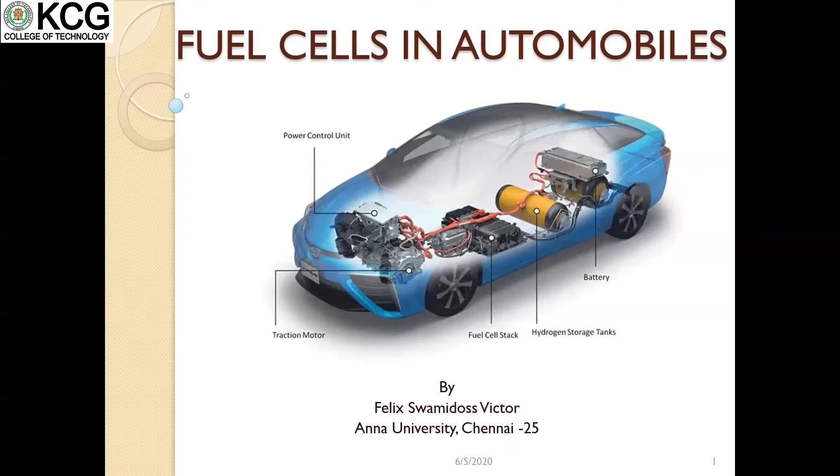As Motilal sir said, I'm Felix Swamidoss Victor, and I did my PhD in mechanical engineering, and my expertise area is fuel cells, that is high temperature fuel cells. I also work in electrospinning for air filtration. This presentation is simple and not brief, so that persons who don't understand the simple concept of a fuel cell can understand it. So this is a simple topic about fuel cells. Let us go into the slides.

These are the chapters which we are going to discuss in this presentation. First, what are the types of fuels that we are using in IC engines? The next is the difference between battery vehicles and fuel cell vehicles. Next, what is a fuel cell and how it works. Next, parts of a fuel cell. Next, the history of fuel cells, how they came into existence. And the next is types of fuel cells. There are 7 different types of fuel cells available; I will tell you later.

The next is hydrogen as a fuel, why we are using hydrogen as a fuel instead of other gases. Next is problems in hydrogen as a fuel; there are also some problems in hydrogen, I will tell you. Next, commercial fuel cell vehicles which are available in the market, and the list of fuel cell vehicles which came into existence in 2020. These are the chapters which we are going to discuss. Now let us go to the first slide.

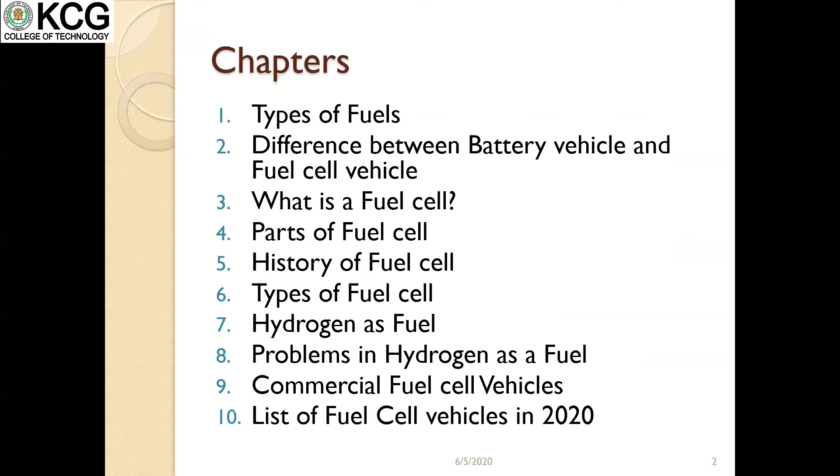First, let us discuss the types of fuels that we are using in an IC engine. The types of fuels are petrol, diesel, liquefied petroleum, compressed natural gas, ethanol, and biodiesel. These fuels are highly efficient and highly reliable. So why do we have to move towards e-vehicles? E-vehicles are nothing but battery powered vehicles and fuel cell vehicles. Though these fuels give high efficiency, why do we have to move towards e-vehicles?

The first problem with these fuels is depletion of natural resources. Depletion is one of the major problems; we cannot get fuels from other resources, because the oil economy is based on the fuels, right? The major economy of the world's countries is based on oil only. So we should move towards e-vehicles.

Then the next major problem is pollution. Pollution is one of the major problems for global warming. About 75 to 80% of the maximum pollution is caused only through IC engine vehicle exhaust, which causes maximum pollution gases like COx and other NOx gases. This is why we should move towards e-vehicles in order to safeguard our next generation.

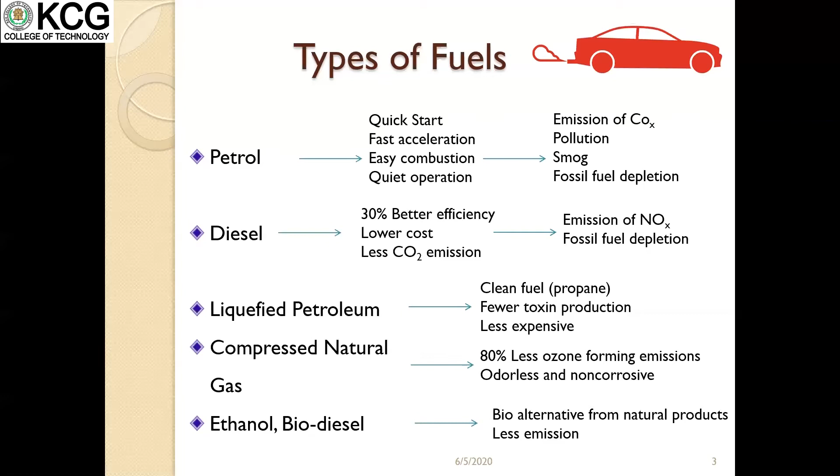Now let us go to the types of e-vehicles. E-vehicles can be classified into two categories. One is battery powered vehicles, another one is called fuel cell vehicles. If you see, these two vehicles are completely different in their working, but something lies common in between them. It is the principle of working.

In the case of battery powered vehicles and fuel cell vehicles, they work on the principle of converting the chemical energy, that is the fuel, directly into electrical energy. If you take an IC engine, internal combustion engine, what principle does it work on? It works on the principle of converting the chemical energy, that is the gasoline, into heat energy, and then it is used as mechanical energy. But in the case of e-vehicles, it is completely different.

Now we can see what a battery powered vehicle is. A vehicle which gets powered through a self-contained battery by converting the fuel into electricity. Such types of vehicles are called e-vehicles. Most vehicles we are using use lead acid batteries or lithium ion batteries, which are low cost batteries, and really efficient in the case of battery powered vehicles.

What are the advantages of battery powered vehicles? First, it doesn't produce noise pollution or other pollution. Next, when compared to an IC engine, it has very less maintenance, because we don't have to do monthly or yearly maintenance. We don't have to change its system like oil changing or the cooling system. There is no filter, there are no belts or hoses to replace. So these are the advantages of battery powered vehicles.

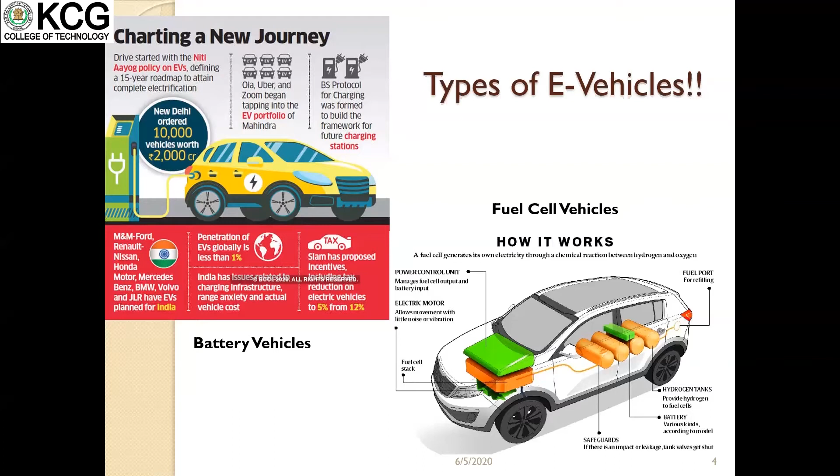Next is fuels. What type of fuel are we using in a fuel cell vehicle? It is hydrogen, which cannot be easily transported or stored. So if there is a fuel cell station, the reforming unit of hydrogen should be there, because it is difficult to transport hydrogen on a large scale. So those are the major disadvantages and the difference between e-vehicles, that is battery powered vehicles, and fuel cell vehicles. Now let us go to what is meant by fuel cell.

Now let us see the working of fuel cell. I will give a simple definition. You can make a note of it. Fuel cell is an electrochemical device that directly converts chemical energy into electrical energy. A fuel cell is similar to a battery powered vehicle, which directly converts chemical energy into electrical energy, whereas in the case of an IC engine, the chemical energy is converted into heat energy and then into mechanical energy. Both batteries and fuel cells convert chemical energy into electrical energy.

And about the byproduct of this process: in the case of an IC engine, what is the byproduct? The tailpipe exhaust. We get particles such as carbon monoxide and nitrous oxide in the tailpipe exhaust, which is an emission. In the case of a battery powered vehicle, what is the output we get? We get an output as heat. In the case of fuel cell, the output is nothing but heat and water. I will explain the working in the next slide.

You can see here, a battery powered vehicle is a closed store of energy within it. So when the charge gets depleted, we should recharge the battery for 3 to 4 hours. But in the case of fuel cell, we can go to a fuel station, we can refuel it, and we can use it, which is a very efficient way.

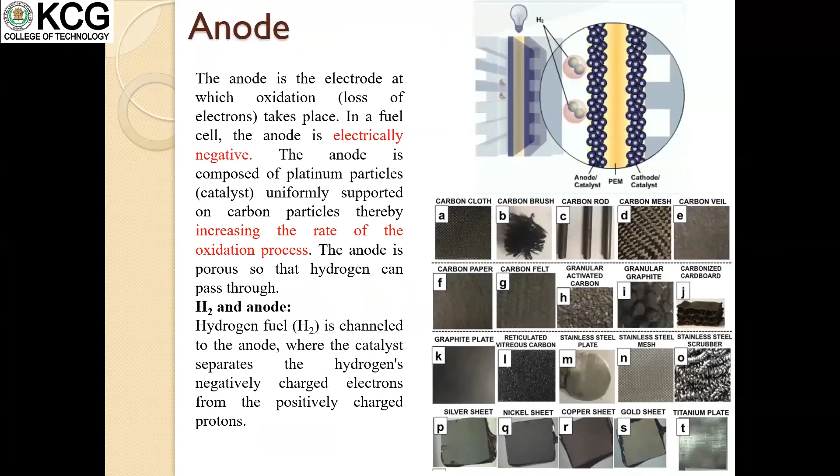We can also use graphite and other noble metals like silver, gold, and titanium as an anode. In the case of a cathode, we can use similar metals. Whatever we have used for the anode, you can use the same metals for the cathode.

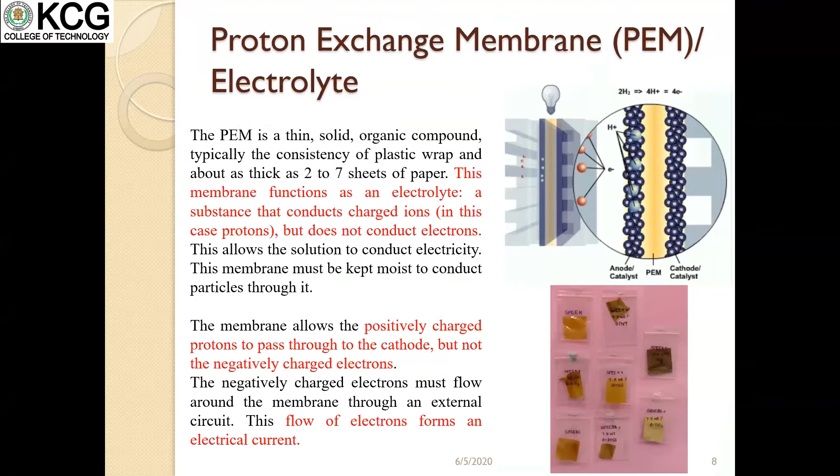You can see anode lies in the left part of the fuel cell and cathode lies in the right part of the fuel cell. Okay, what is the center part? The center part is called the heart of the fuel cell, which is nothing but the membrane. What does a membrane look like? A membrane just looks like a plastic wrap. As you can see in the right corner, these are the types of membrane which we have developed in our university for use in fuel cells. A membrane is the one which only allows the positive charges to pass through.

Now I will explain the working, how it works. If you see in anode and cathode, each consists of a catalyst. Mostly, the catalyst will be a platinum catalyst if the fuel cell is used in vehicles. Okay. The anode part consists of a catalyst and the cathode part consists of a catalyst. Now, let me tell you what happens here.

When the fuel is supplied into the fuel cell, the hydrogen gas comes into the anode chamber, which is the negative pathway of the fuel cell, where it touches the catalyst and the hydrogen atom splits into two. One is the electron and the other one is the proton, where the electron is the negative charge and the proton is the positive charge. So what happens? The membrane only allows the protons to pass through, while the electrons get transferred through an outer circuit. If an electron moves, what happens? Simple. Electricity is generated, so that electricity can be used to run a vehicle.

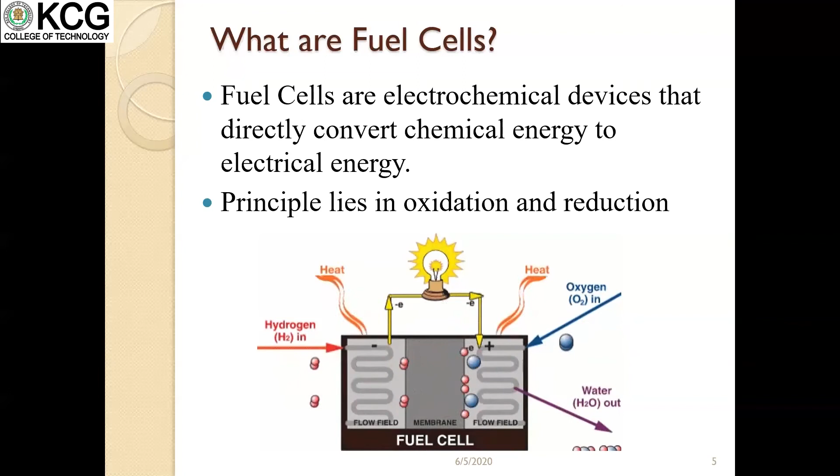So what happens in the cathode section? In the anode section, oxidation takes place, and in the cathode section, reduction takes place by combining hydrogen, which combines with the oxygen molecule readily available in the environment. So the output will be water and heat. This is how a fuel cell works. This is the simple concept of how a fuel cell works.

I will show you in this diagram, in this video. One minute. You can see in this video the hydrogen molecules come in contact with the catalyst in the anode, and they get split into two. One is the positive charge which passes through the electrolyte, and the negative charge passes through an outer circuit. Now what happens? The negative charge and positive charge recombine. That is, reduction takes place; they recombine with each other, combine with the oxygen molecule, and form an output of water. This is the working of the fuel cell.

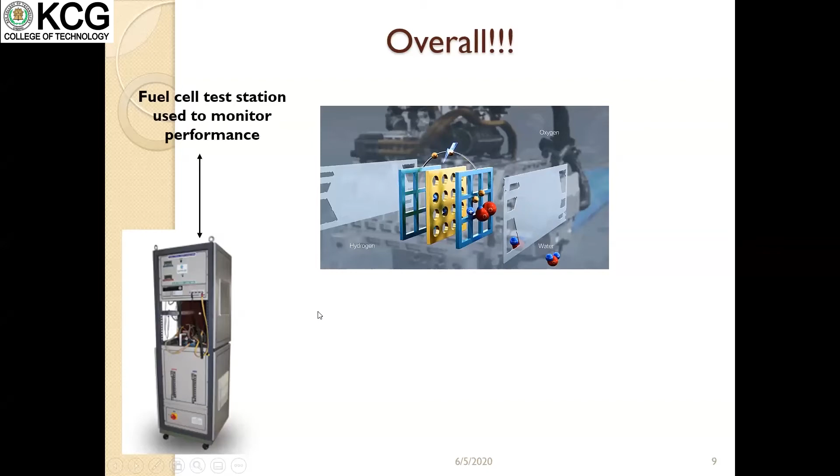Okay, now let us see. Sorry, one minute. Now let us see the history of the fuel cell. So this is the history. The fuel cell was first invented in the early 1800s. It is more an evolutionary technology than a revolutionary one. The fuel cell was originally invented in the early 1800s by Humphry Davy. He was the one who first gave the principle of what later became the fuel cell. This technology was gradually developed and used in the NASA Apollo space program in the late 1960s to 1970s.

At this time, General Motors was the only company who came up with the idea of developing a fuel cell. The first fuel cell which came into development was an alkaline fuel cell. There are different types of fuel cell; I will tell you in the next slide. General Motors was the first one to develop an alkaline fuel cell, which they used in the Gemini space program.

It is a tractor which produces an output power of 15 kilowatt with a pulling weight of 1360 kilograms, which is really high at that time. And early in 1966, General Motors also designed a vehicle, a minivan, which can run a top speed of 114 kilometers with a traveling range of 240 kilometers by using a fuel of about 5.4 kilograms of hydrogen.

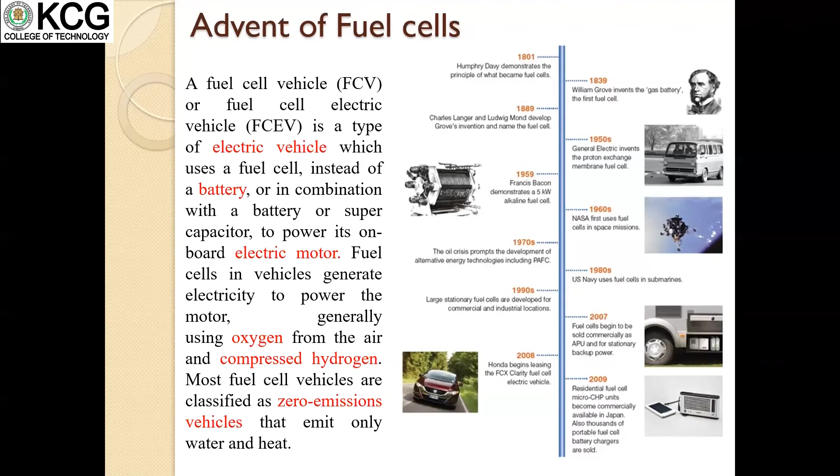In the last decade and this decade, you can see there are not many fuel cell cars developed. In the last year, there are so many fuel cell cars that came into market. The major 4 companies which are contributing in fuel cell vehicles are Hyundai, Honda, Nissan, and Toyota. In the case of India, there are fuel cell vehicles, but not commercially available. We are still in the research phase because we are more concentrating on battery powered vehicles.

Next, you can see types of fuel cells. Fuel cells can be classified into 7 different types, based on 2 categories: one is the type of membrane it uses, and the other is the type of fuel it uses. First is the proton exchange membrane fuel cell, a technology invented in 1958, but which we are still using. Its temperature is around 80 to 100 degrees Celsius, so this technology is still used in vehicles.

The alkaline fuel cell was the first technology ever developed by General Motors. Here the electrolyte is potassium hydroxide, which is a liquid, and the temperature range is 150 to 200 degrees Celsius, which is relatively very high compared to proton exchange membrane fuel cells, so it cannot be used in vehicles. Alkaline fuel cells are used in the space station to produce heat as well as water for the humans working in the International Space Station.

Next is phosphoric acid fuel cells, otherwise called stationary fuel cells, because due to their large size they are only used for stationary purposes. The electrolyte in phosphoric acid fuel cells is phosphoric acid, which is also a liquid, and the temperature is relatively very high, 180 to 200 degrees Celsius, and they are used for hydrogen production.

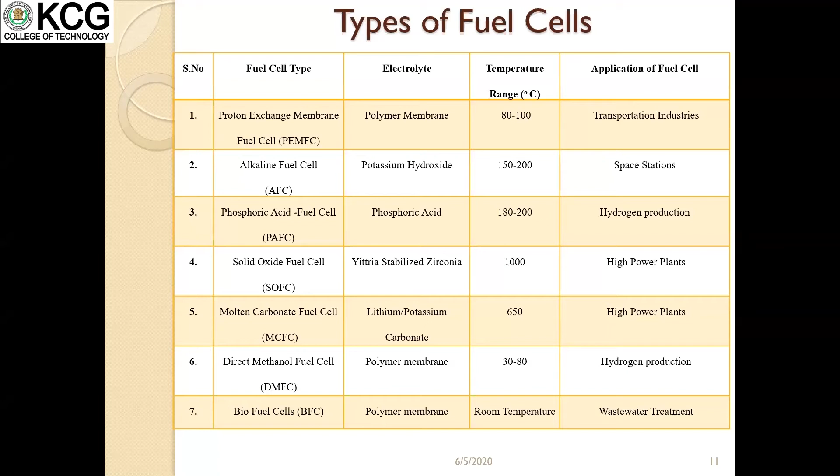From that wastewater we can generate electricity, but the electricity is not up to the mark of a fuel cell, because a fuel cell is relatively highly efficient and can run a power plant. But a biofuel cell can only charge a mobile phone. That is a simple application of a biofuel cell. They are still used in wastewater treatment to produce electricity.

Next, we can go deeply into the types of fuel cells. This is known as the proton exchange membrane fuel cell. As you can see in the image, this is how it looks. A proton exchange membrane fuel cell is otherwise called a polymer electrolyte membrane fuel cell. What is the advantage in it? It delivers high power density and offers the advantage of low weight and volume compared with other fuel cells.

As I already said, the proton exchange membrane fuel cell uses a polymer membrane, but we can use other types of membrane like Nafion. Nafion is one of the major types of membrane used all over in vehicles, because it is relatively cheap and highly efficient.

Next, what fuel does the proton exchange membrane fuel cell need? They only need hydrogen and oxygen from air to operate. They are typically fueled with pure hydrogen supplied from storage tanks or reformers. The proton exchange membrane fuel cell operates at a relatively low temperature. That's why we are using it in vehicles, and its major advantage is a fast starting time. For a vehicle to start up, it needs a fast starting time, and this fuel cell has one.

However, it requires a noble metal catalyst, typically platinum. I have told you, the catalyst is the one which splits the hydrogen molecules into protons and electrons. So the proton exchange membrane fuel cell needs a catalyst made of platinum. As you know, platinum is extremely costly and extremely sensitive, so it adds system cost. Why is it extremely sensitive?

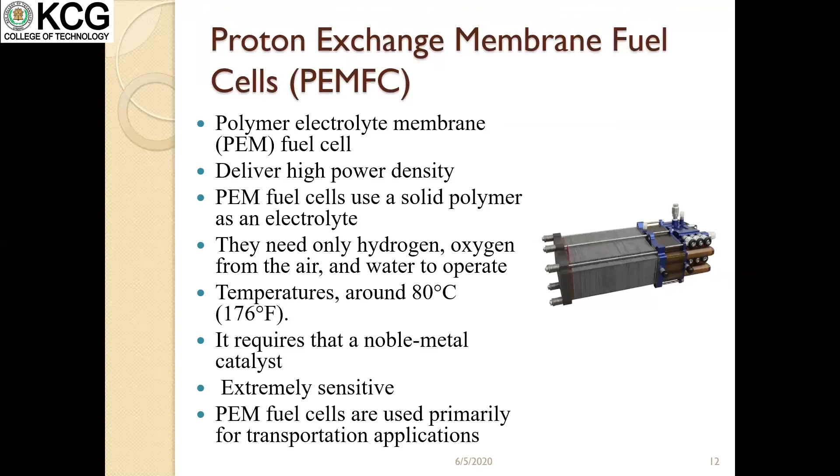Now let us see the alkaline fuel cell. You can see the alkaline fuel cell in the right corner. This is how an alkaline fuel cell looks in the space station. We are using it in the space station. The alkaline fuel cell was the first fuel cell technology which was developed.

They were used for the US space programs to produce electrical energy and water onboard spacecraft for the humans who are working there. Okay, these fuel cells use a solution of potassium hydroxide. In the case of proton exchange membrane fuel cell, we use a polymer membrane. In the case of an alkaline fuel cell, we use potassium hydroxide as an electrolyte, and a non-precious metal can be used as a catalyst.

Whereas in the proton exchange membrane fuel cell, we use a catalyst called platinum. Okay, but in the alkaline fuel cell, we don't need to use a platinum catalyst. We can also use other types of non-noble metals, which are relatively cheap.

Next, in recent years, instead of using an alkaline potassium hydroxide liquid, scientists have developed the idea of an alkaline membrane. Okay, alkaline membrane. They have developed an alkaline membrane which is more efficient than potassium hydroxide. These fuel cells are closely related to the conventional proton exchange membrane fuel cell, except they use an alkaline membrane instead of an acid membrane.

And as you can see, the high performance of the alkaline fuel cell is due to the fast electrochemical reaction that takes place. We can get an efficiency of about 60% from the alkaline fuel cell. And the key challenge in this fuel cell is that it is susceptible to poisoning by carbon dioxide. Both proton exchange membrane fuel cells and alkaline fuel cells can be poisoned.

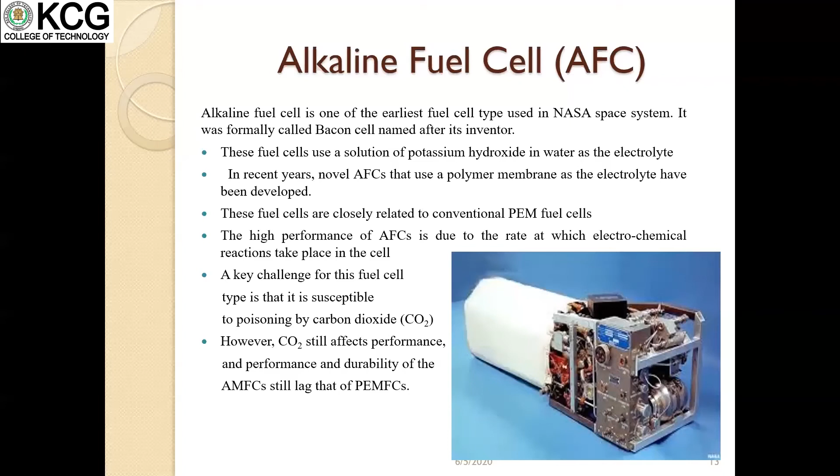Now you can see this is the phosphoric acid fuel cell. You can see the image of the phosphoric acid fuel cell, which looks like an inverter, right? It is really big, and it occupies a large volume. The phosphoric acid fuel cell uses liquid phosphoric acid as an electrolyte, the same as the alkaline fuel cell uses potassium hydroxide. In the phosphoric acid fuel cell, this acid is contained in a Teflon bonded silicon carbide matrix.

Okay, it is bonded in a silicon carbide matrix, and porous carbon electrodes containing platinum as a catalyst are used here, because phosphoric acid and proton exchange membrane fuel cells should use porous carbon with platinum as a catalyst, since platinum is the only compound in phosphoric acid fuel cells which can separate the fuel. Okay, that is the hydrogen.

The phosphoric acid fuel cell is considered the first generation of modern fuel cells. It is one of the mature cell types and the first to be used commercially. This type of fuel cell is typically used for stationary power generation. They are not used for transportation; we cannot use the phosphoric acid fuel cell in vehicles because it occupies a large volume. The phosphoric acid fuel cell can give an efficiency of about 85% when heat and electricity are combined.

But if we calculate only the electricity, the phosphoric acid fuel cell can only give 37 to 42%, which is much less than the alkaline fuel cell and proton exchange membrane fuel cell. As a result, they are typically large and heavy. They also require a much higher loading of platinum compared to the proton exchange membrane cell to separate the molecules. So that adds cost to the system, and it is really expensive.

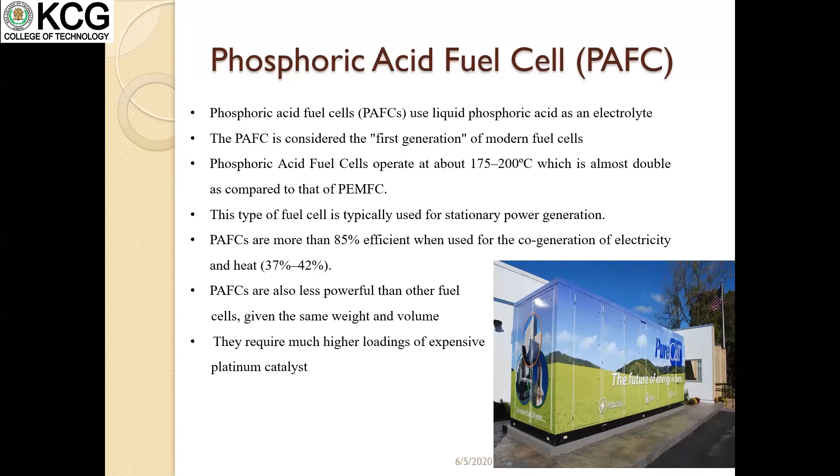Phosphoric acid fuel cell is expensive. Next is solid oxide fuel cell. Solid oxide fuel cell is something different because it is called a high temperature fuel cell. I will tell you why. Solid oxide fuel cells use a hard porous ceramic compound as an electrolyte.

They never use a polymer membrane because they operate at a temperature of 1000 degrees Celsius, and at that temperature we cannot use a polymer membrane or potassium hydroxide or alkaline. We cannot use that because it will evaporate and it will melt. So we are using a ceramic.

Usually we are using zirconia as an electrolyte. The advantage in the solid oxide fuel cell is we don't need any catalyst to split the molecules because it is operated at a temperature of 1000 degrees Celsius. We don't need any catalyst like platinum or any other noble metals. Okay, what is the other property of this solid oxide fuel cell?

It is sulfur resistant, so corrosion resistant, and it cannot be poisoned by either carbon monoxide or carbon dioxide. And not only hydrogen, it can also use natural gas, biogas, and gas made from coal as fuel. This high temperature operation also has a disadvantage. What disadvantage is that? It has a slow startup time.

This slow startup time will never let the solid oxide fuel cell get into vehicles, because in vehicles we need a fast startup time like the proton exchange membrane fuel cell. And it works at a temperature of 1000 degrees Celsius. At this temperature, heat is generated, so we need thermal shielding. Thermal shielding is also costly, so it is also a problem. This is acceptable only for utility applications, but not for transportation.

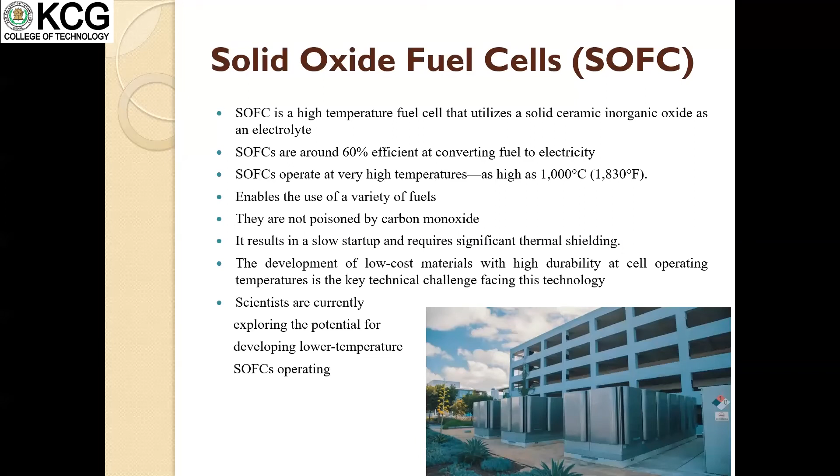This high temperature decreases the durability of the material, which is a key challenge we are facing in this technology. Nowadays, scientists have developed a solid oxide fuel cell that operates at about 700 degrees Celsius. But when we compare it with the 1000 degrees Celsius solid oxide fuel cell, the efficiency is relatively very low. Next is molten carbonate fuel cell.

Molten carbonate fuel cells are currently being developed for natural gas and coal-based power plants for electrical utility, industrial and military applications. Molten carbonate fuel cells are also known as high temperature fuel cells, like solid oxide fuel cells, operated at 600 to 700 degrees Celsius. What is the electrolyte? A molten carbonate salt mixture suspended in a chemically inert ceramic lithium aluminum oxide matrix. This compound is highly resistant to heat.

Because they operate at 650 degrees Celsius, which is a relatively high temperature, we don't need any catalyst, as I said for the solid oxide fuel cell. We don't need a catalyst like platinum in molten carbonate either, because a temperature of about 650 to 700 degrees Celsius is enough to split the molecules.

Next, improved efficiency is another advantage of the molten carbonate fuel cell. Compared with other fuel cells, molten carbonate is the only fuel cell which can give an efficiency of about 65%, which is relatively very high. And when it co-generates heat and electricity, it can give up to 85%.

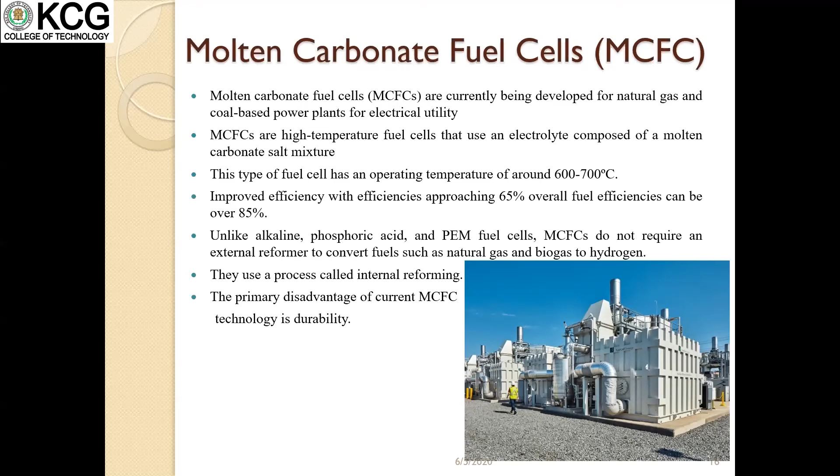What is the disadvantage? The primary disadvantage is durability. Durability is the major problem, and corrosion is also a major problem in the molten carbonate fuel cell. Next is direct methanol fuel cell. Direct methanol fuel cell is completely different from other fuel cells.

You can see direct methanol fuel cells usually use pure methanol, which is mixed with water and fed directly into the anode to start the reaction. Whereas in the case of other fuel cells, we are using hydrogen, natural gas, coal gas, and other gases also. But in the case of the direct methanol fuel cell, we are using only methanol.

So it has an advantage over other fuels because we don't have to transport methanol like hydrogen. Because hydrogen is a less dense material, it is difficult to transport. Whereas methanol is similar to gasoline and diesel, which we can transport with our infrastructure. So it is not a problem.

And the other disadvantage of the direct methanol fuel cell is that it can only be used to provide power for portable fuel cell applications, like a laptop; it can charge a laptop and a phone. So this is the major disadvantage of the direct methanol fuel cell.

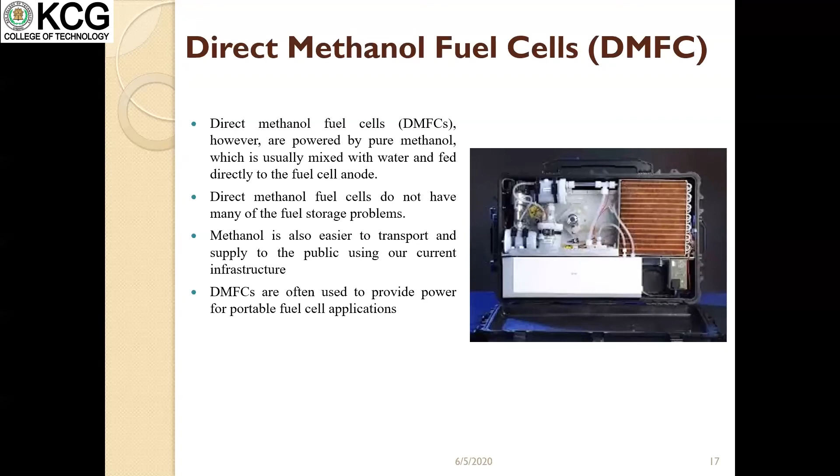By using the wastewater, we can generate electricity, but it is much less efficient when compared with other fuel cells, because they give an output voltage which is relatively high, and with that voltage a power plant or a vehicle can run. But this microbial fuel cell gives a very low efficiency, because it is still for research purposes; it is not in large scale industries.

Okay. Why did I mention fuel cell stacks here? Because if you take a battery powered vehicle, there will not be a single battery to power a vehicle. If you have seen a battery powered vehicle, there will be stacks of batteries. There will be dozens of batteries, each connected to a single circuit, so that you can charge and use the vehicle efficiently and travel a distance.

Okay. The same is seen in the case of the fuel cell stack; a fuel cell is similar to a battery. A single fuel cell can never run a vehicle, because a single fuel cell produces a small amount of energy, whereas a stack of fuel cells produces a really high amount of energy which can run a vehicle. That's why I mentioned fuel cell stacks here.

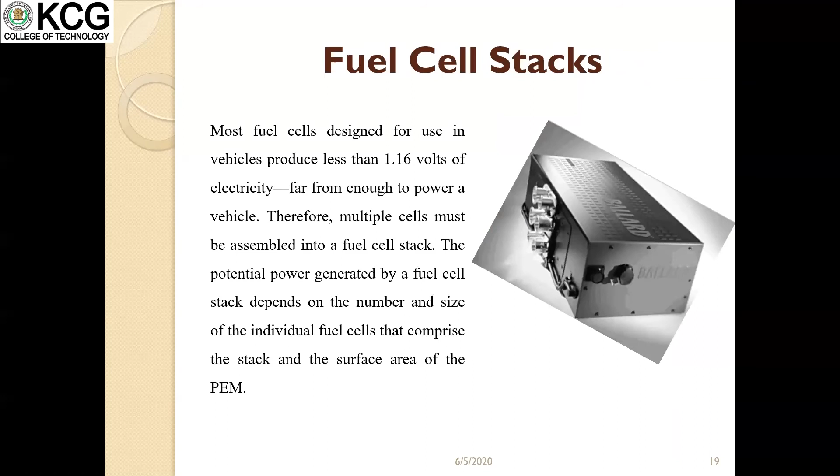Next is why we should use hydrogen as a fuel. Though we have methanol and natural gas as fuels, why do we have to use hydrogen as a fuel? Because hydrogen has the highest energy per mass of any fuel. And the other thing is, hydrogen is the most abundant element in the universe.

And though it is abundant in the universe, it cannot be naturally found on Earth. Hydrogen must be extracted from other sources. It is always combined with other elements, like in water, which consists of hydrogen and oxygen. So hydrogen must be separated from oxygen by a process known as electrolysis. But the problem is that removing hydrogen from water, like by electrolysis, is really a costly process.

Next, what is the advantage of hydrogen? In its purest form, hydrogen is a non-toxic, colorless and odorless gas. But the problem is, hydrogen is more readily flammable than any other substance. Okay. Next, hydrogen is like electricity. We can call hydrogen an energy carrier rather than an energy resource, because it has a lot of energy in it.

Next, both electricity and hydrogen can be produced from all energy resources. From natural gas, petroleum products, and coal we can produce hydrogen; by solar and wind electrolysis we can produce hydrogen, and even from biomass. So producing hydrogen is not a problem. Millions of metric tons of hydrogen are produced annually all over the world, which is enough to fuel millions of fuel cell cars.

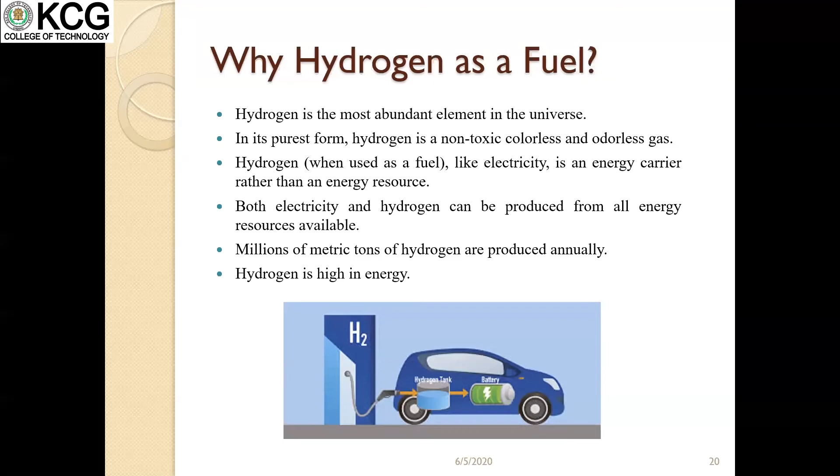But what is the problem when it comes to using hydrogen as a fuel? The first and major problem is, we cannot transport hydrogen and we cannot store hydrogen. Why can't we store it?

Hydrogen is difficult to store because it has very low volumetric energy density. If you weigh 1 liter of water, it will weigh approximately 1 kg, right? But if you weigh 1 liter of hydrogen, it will be only 92 milligrams. So it is a very low energy density material.

Hydrogen is the simplest and the lightest element available. It is lighter than helium itself. Next, hydrogen is 3.7 times less dense than natural gas and 2,700 times less dense in energy density than the gasoline we are using. In the case of onboard storage, if we have to store hydrogen for a vehicular application, it should be lightweight, compact, safe, cost effective, and it should also run above 300 kilometers.

Although various hydrogen storage technologies are presently available, none satisfies the automobile industry's requirements, because we are not able to manufacture hydrogen storage for vehicles which satisfies the conditions of the automobile industry. In fact, finding a solution to the hydrogen storage problem is considered the foremost challenge for the hydrogen economy.

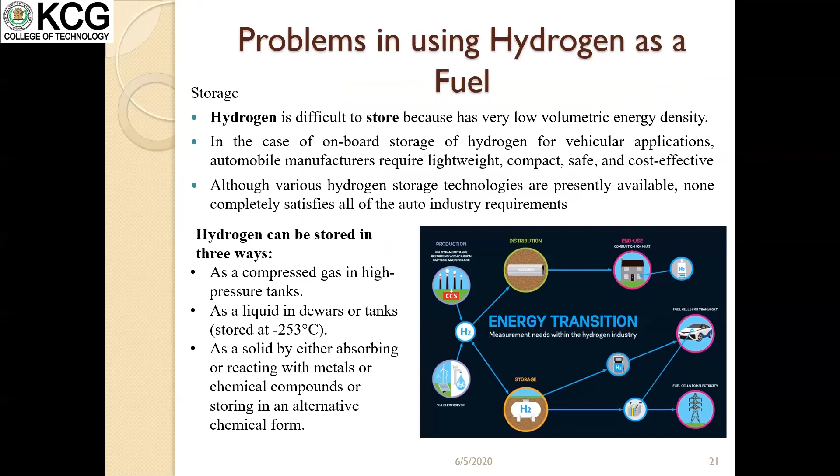Next, we can store it as liquid hydrogen, as I mentioned in the second point. How can hydrogen gas be converted into liquid? It is converted when it goes below minus 253 degrees Celsius, which is a very low temperature, much lower than nitrogen. Liquid cryogenic hydrogen also occupies 3 times more volume than its original capacity. So when hydrogen gets liquefied, there is a significant energy loss which cannot be used as fuel.

There is also another problem. Hydrogen is harder to liquefy than any other gas except helium. Liquid hydrogen is colder than any other substance except liquid helium, much colder than liquid nitrogen. I think most of you have seen liquid nitrogen, which we use for cryogenic machining purposes. Liquid hydrogen is colder than liquid nitrogen, so we cannot use it for a fuel cell.

Next, hydrogen cannot be directly vented to the atmosphere. If an accident takes place and hydrogen goes into the atmosphere, an explosion hazard will occur. So transportation is a problem.

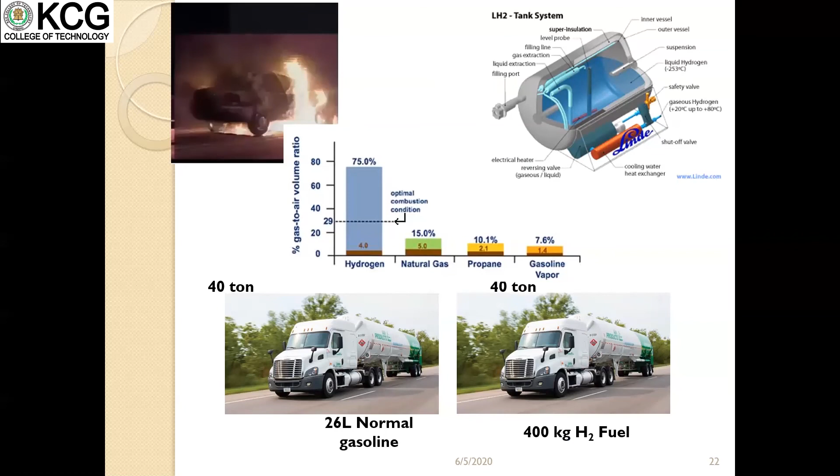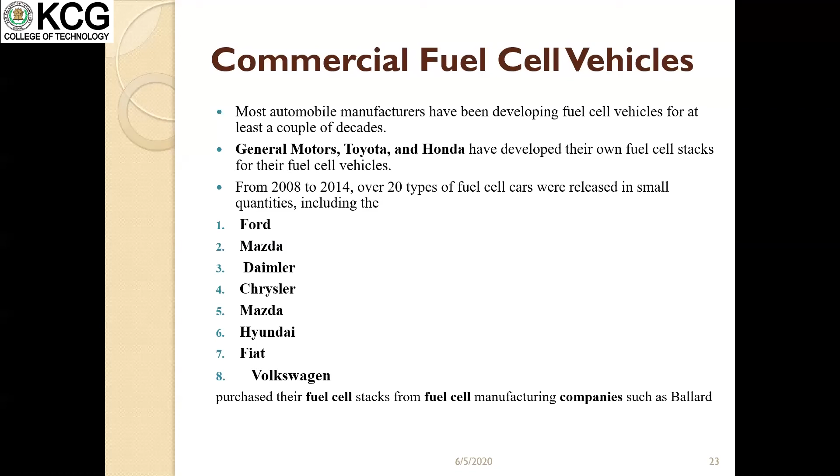But companies like Ford, Mazda, Daimler, Chrysler, Hyundai, Fiat, and Volkswagen are all using fuel cell stacks which can be powered from Ballard Power Systems. Ballard Power Systems is one of the major companies producing fuel cells. So they are buying fuel cells for the vehicles from Ballard Power Systems depending on the requirement.

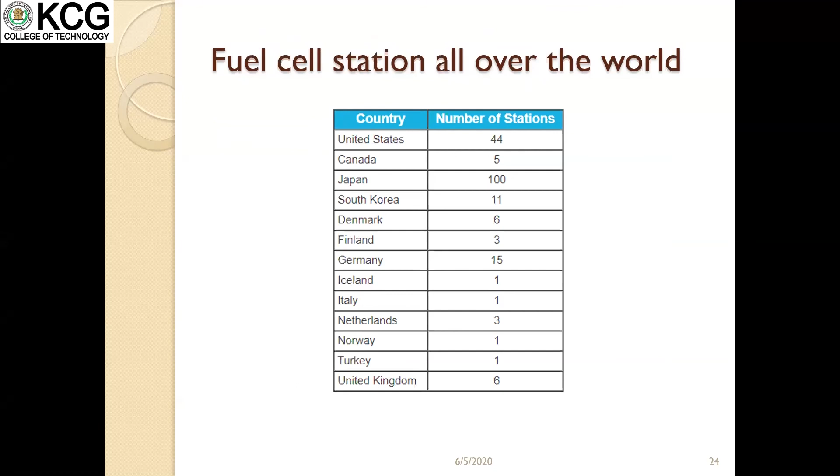They are concentrating on fuel cell vehicles, and other countries like America and Germany nowadays are concentrating more on fuel cell vehicles than electric vehicles. But in this list, we cannot see India, because only in this decade is India concentrating on electric vehicles, and the fuel cell vehicle is still for research purposes in India. Fuel cell vehicles are not commercially available, but concept cars are available from Tata.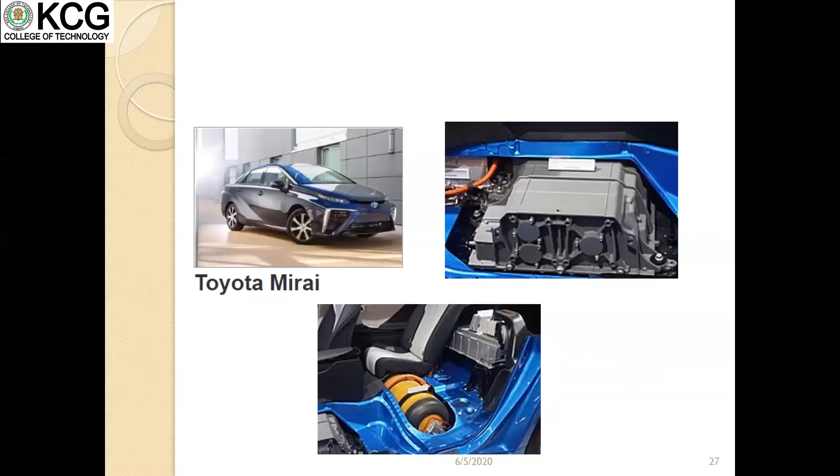So this is all about the fuel cell. These are the basics about fuel cells that I wanted to tell you all. And if you want to go into detail, I can also do another session.

But I have a little bit of work, I have to attend my meeting. Next, I have a meeting, so I have to move on.

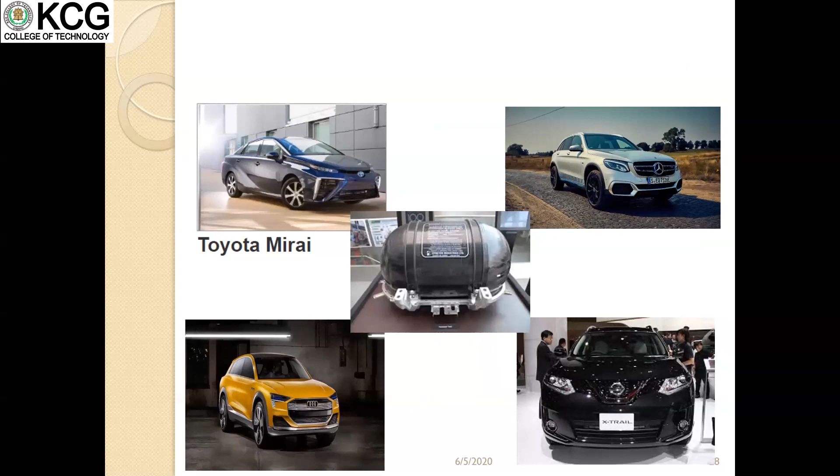So I will tell you the research activities that we are doing in Anna University College of Engineering, Mechanical Department. The main research activity we are doing is fuel cells. We are working on alkaline fuel cells and proton exchange membrane fuel cells, and also on microbial fuel cells. We also have patents for our fuel cell, and we are also working on drug delivery using nanofibers and on air filtration using nanofibers. These are the areas of research activities in which we are involved.